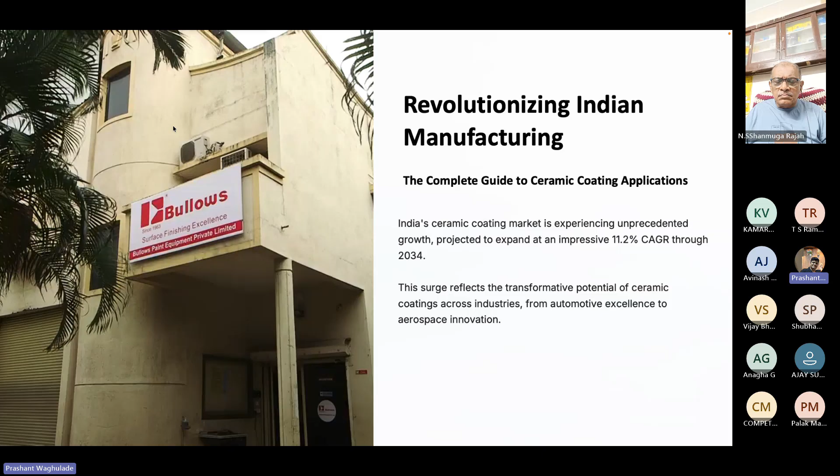So when we talk about ceramic applications, the first thing that comes to mind is sanitary wares, bathroom wares, kitchen wares where the ceramic coating is applied. Whereas ceramic has got wide applications across the industry, which start from automotive and in fact go up to aerospace applications, for the various kinds of advantages we get with ceramic coating. So let's go ahead to the next slide.

Okay, now the overall global market of ceramic coating was around 12.15 billion US dollars, which is an impressive and very big market. And the Indian market is growing at 11.2%. Out of this 12.15 billion, India has got a 512.4 million US dollar market today for ceramic coating. It will grow up to $1 billion by 2033, which is going to be a big market.

So today, if we gather more customers related to ceramic coating, they are going to give you multiple business or huge business in future. So that's the reason we specifically took the ceramic coating application as the first application to discuss.

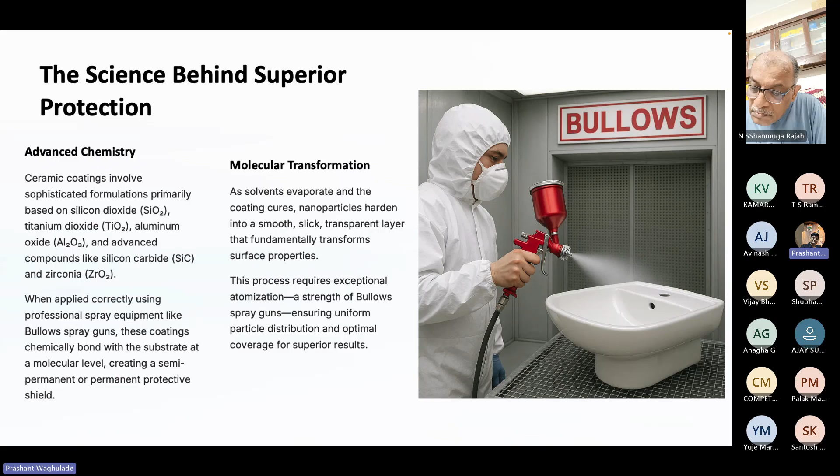Now our role is, once we know that these chemicals will be available at the customer's place, we are left with the application. Now, what kind of applications are available, or where is it being used? The first or major application is automotive. In automotive, you all might have seen that ceramic coating is one of the trending applications in the market, going from the OEM up to the garages, even local level garages. Everywhere ceramic coating is a well defined, popular application. For example, our 630 gun or gravity feed gun works for this coating application.

For example, Jaguar, which is a Tata Motors company now, has a plant in Pune. Jaguar and Land Rover vehicles are imported in India; those are not manufactured in India. Once these vehicles are imported in India, they come with a coating and everything. But during transit, we have seen that most of the surfaces get at least a little dent, and since these are luxurious cars, they are thoroughly checked. Even a small scratch on a car is not acceptable to the customer because of the amount of money they pay. So these vehicles are getting repainted or touched up with ceramic coating using Bullows spray guns.

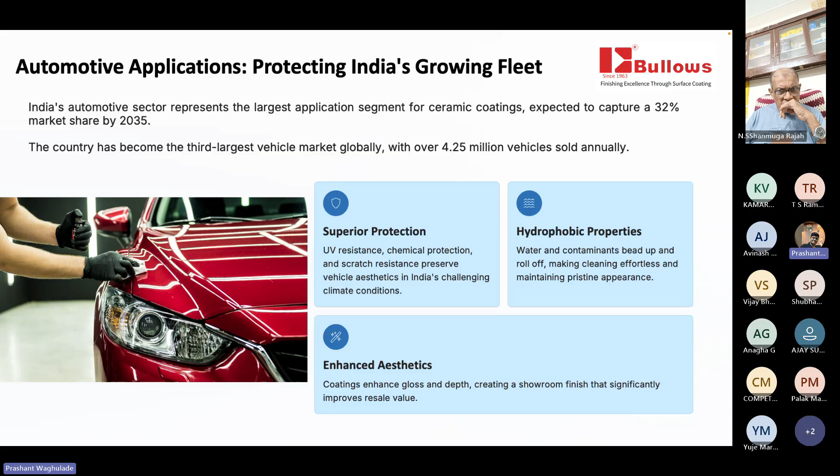Now, the next application, which is a growing market in India at least, is aerospace. The aerospace market is growing along with the time in India. Aerospace is not only growing in terms of commercial plane manufacturing, but for defense it is growing, and even for the space programs it is growing. So I would urge each one of you to just look around in your area. You will 100% get this kind of application.

Say, for example, the equipment or products which need to sustain more than 1500 degrees Celsius, where ceramic coating is required using zirconia chemical, or even a silicon carbide chemical which is used separately, so these are the combinations of the ceramic coating. These kinds of ceramic coatings are mainly required for aerospace and other high-speed applications, where extreme heat is generated because of the kinetic motion. There our spray guns are used for such applications, and you have tremendous scope to have the coatings and the product used for such applications.

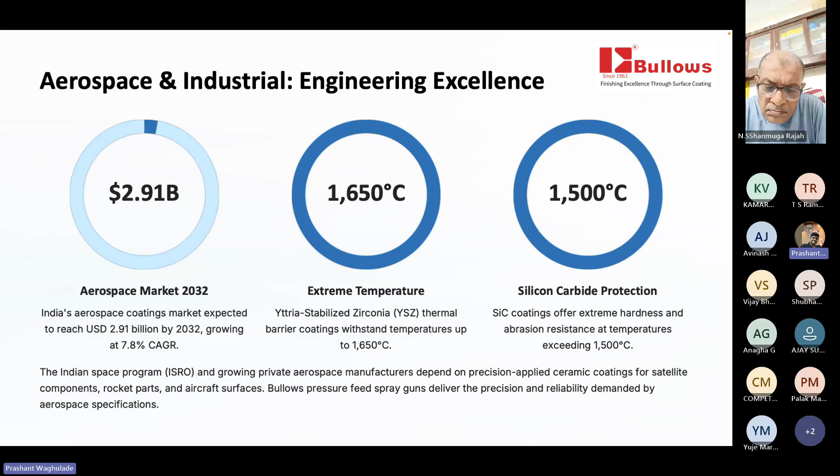Now, moving ahead, we have diverse industrial applications, like power generation, and a few automotive components where again heat is generated, for example the exhaust system. The exhaust system of even shipbuilding also has this application.

I'm really sorry for this.

Now the construction and infrastructure. There, a few epoxy-based ceramic applications are now coming up in India, which give you extraordinary corrosion and abrasion resistance, mainly used for C5 climatic conditions. We will take a separate session on the classification of the climatic conditions, which is a very important part when we talk about spray painting equipment.

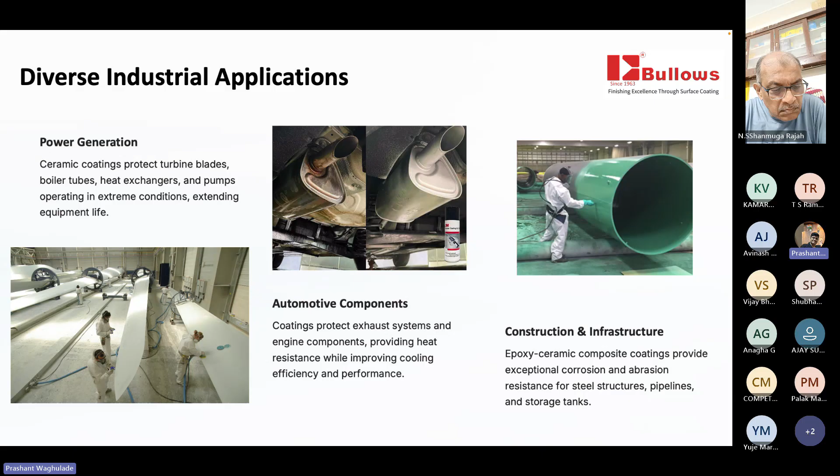Now, one of the popular applications in the Indian market is the cookware revolution, where we have a lot of experience as Bullows. You might also have been selling these spray guns to the cookware industries in large quantities. This is one of the applications where we have a very good grip and very good expertise, not only in manual but automatic also. The cookware industry is another industry where the trend is changing now.

Initially, cookware started with PTFE coating, which is non-stick coating. Slowly, the government started improving the norms considering food safety. So from solvent-based Teflon, the industry shifted to water-based Teflon. Now from water-based Teflon, we are slowly shifting to ceramic coating. Recently we are doing one project for TTK Prestige, where the entire PTFE is getting shifted to ceramic coating.

Here we have to use silicon dioxide and alumina kinds of chemicals, which come with non-stick properties, thermal stability, and better durability for the product. So ceramic coating is one of the widely used applications, and you will find a lot of companies near your region where you will be able to explore the potential of selling Bullows products for this market.

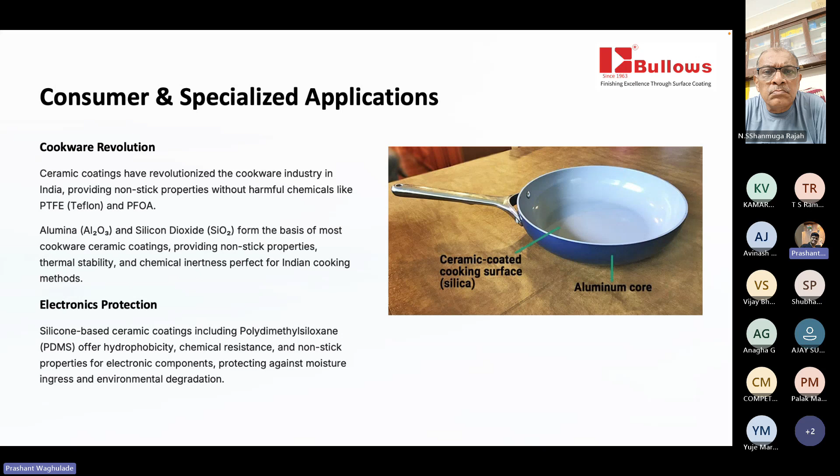Now, here we have ended up with the applications, which are wide applications. We have only covered five, six applications, but these five, six applications have a large consumption in the market, and this is going to improve the business for all of us.

Now, we have four models altogether, which you all are aware of, but I'll just wrap up these two slides in the shortest way. In pressure feed, we have two models, 230 and TLPF. This 230 and TLPF need to be supported by containers. So these are the pressure feed containers or pump-based systems which will be required along with these spray guns.

These spray guns are mainly used for ceramic applications. The alternative available today in the market for ceramic coating is a spray gun with a tungsten carbide tip needle. This tungsten carbide tip needle is a costly affair, along with issues of availability, keeping it in stock, and its price.

Whereas in the case of the 230 spray gun, though the needle is made of Delrin material or nylon material, the cost is very low. The life of this Delrin material is on average 8 to 15 days, depending on the chemical and material. This is considered a good life for ceramic application, because even with SS, the life is only around 7 to 10 days. So you can pass on the cost benefit to the customer.

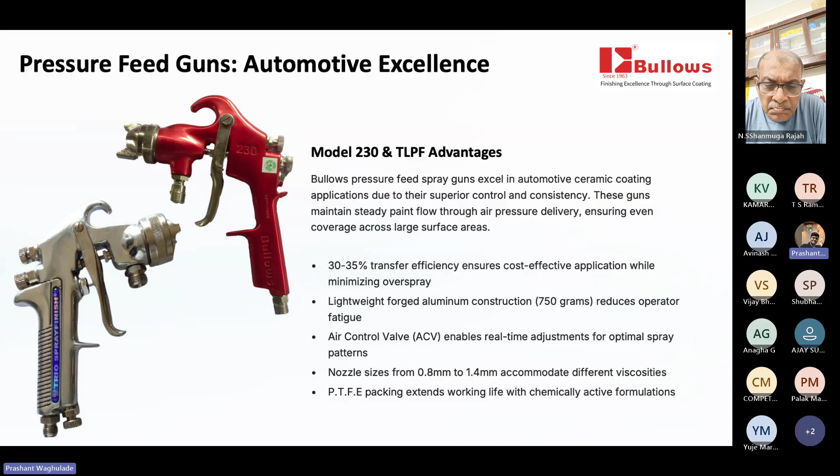That's the main reason why we have a number of installations for 230 spray guns in the Indian market for ceramic applications.

Similarly, we have the 630, a gravity feed gun for limited or lesser applications, where you can use a cup of 500 to 750 ml for your applications.

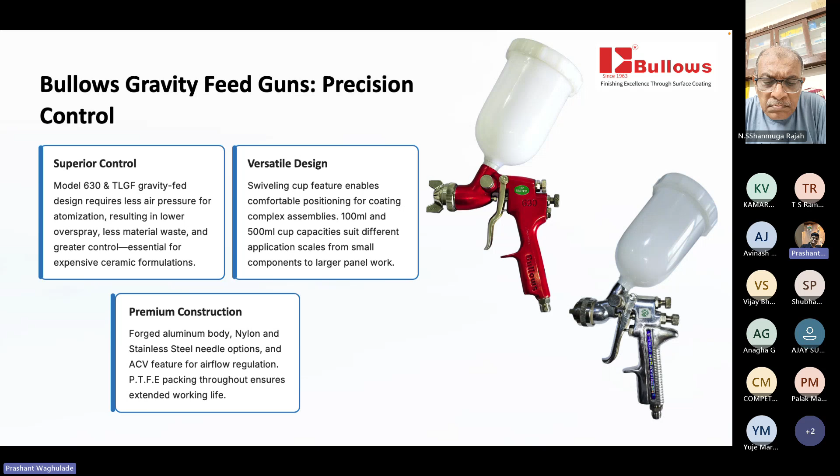We have also made a chart showing which kind of gun can be used for which industry. This small chart will be helpful when you're on a field or talking to a customer. We've put the applications on one side: kitchenware, sanitary ware, bathroom fixtures, thermal barrier coating, electronics coating, premium cookware, and large scale production.

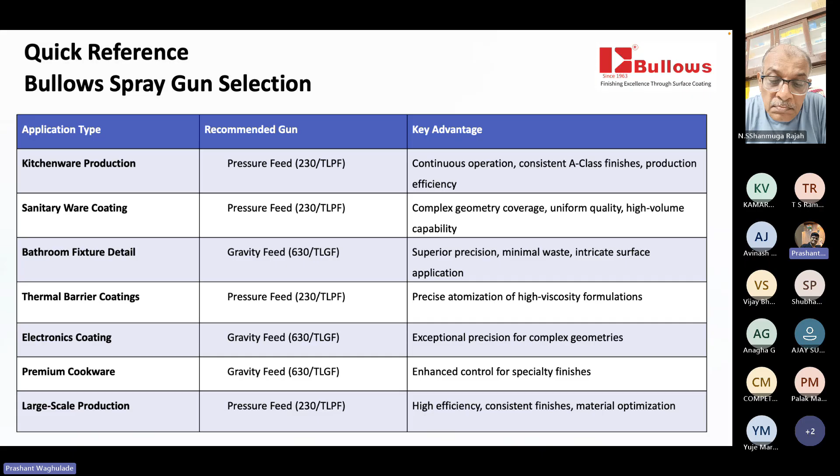For each application, we show what kind of gun is recommended - either the 230, which is a pressure feed gun, or the 630, which is a gravity feed gun - and what benefits you will get. This small chart helps a field person pitch everything properly to the customer.

As we've mentioned, the industry is growing at a very high speed for ceramic application, and we expect each one of you to come up with queries or questions you might have faced related to ceramic coating.